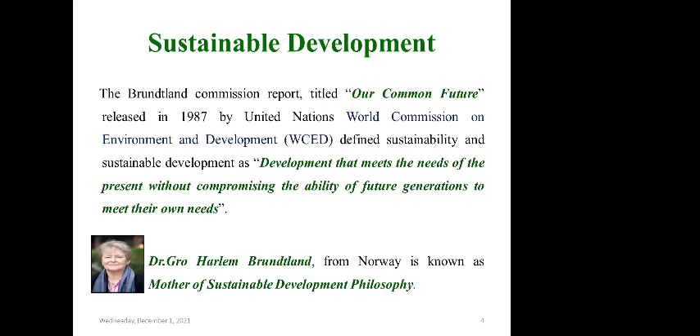According to the United States Environmental Protection Act, a regulatory body, sustainable development is defined as cost-effectively producing goods with minimal environmental degradation. Future engineers should concentrate on minimal environmental degradation while conserving energy and natural resources, which in turn enhances product safety, thereby increasing its global competitiveness. Most of the European Union countries, and even the US, are moving towards this minimal environmental degradation manufacturing process.

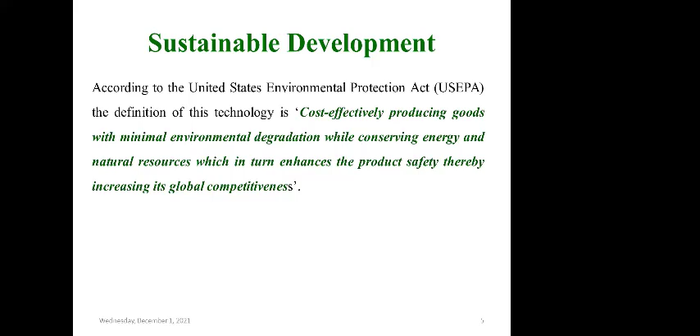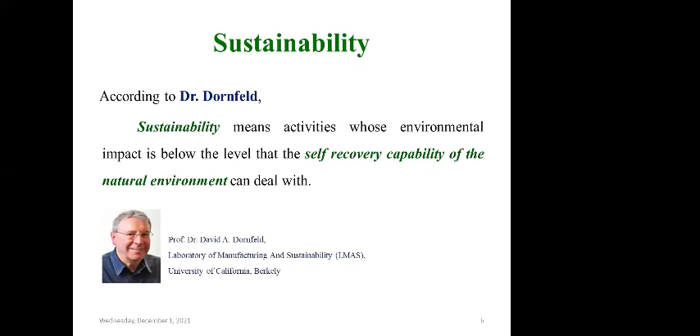According to Dornfeld, sustainability means activities whose environmental impact is below the level of the self-recovery capability of the natural environment. In every nation and in all sectors - for example automobile, textile, medical, aerospace - these are the major manufacturing sectors, and in all these sectors manufacturing is an inevitable process.

Now many countries are showing interest towards eco-friendly manufacturing processes by providing eco-awareness regulations to prevent their environment from further damage.

Here the keyword is eco-friendly. We have to critically think about this word eco-friendly. In simple understanding for the students: the ecosystem comprises all types of plants, animals, minerals, and humans. We humans are the sixth sense animal, and our routine lifestyle should not disturb this ecosystem - that is eco-friendly, and the manufacturing process associated with that is an eco-friendly manufacturing system. Hope you all understood about eco-friendly manufacturing system.

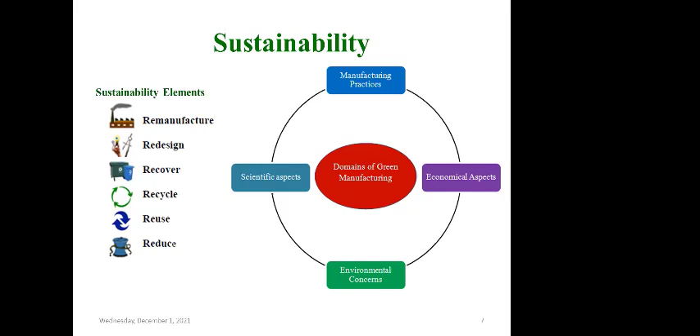Why we have to focus on sustainability? Here I have presented some data. In the last 5 decades, humans have consumed more resources than in all previous history, due to scientific development. In total, 60 billion tons of resources are extracted annually, which is 50% more than just 30 years ago.

As much fresh water is consumed in the last 30 years, let me explain in terms of manufacturing. For producing a car, an automobile, at an average we are consuming 1,48,000 liters of fresh water, not hard water, it is fresh water. 1,48,000 liters of fresh water. Just imagine how big it is.

So how many cars are manufactured in our nation? How many cars are manufactured daily? How many plants do we have? Is a car essential? Yes, it is essential, it is a need. In 2020, without automobiles there is no transportation. But we can think about reusing or recycling effectively. Even our manufacturers are reusing and recycling water, but we can increase the effectiveness of using water with least wastage.

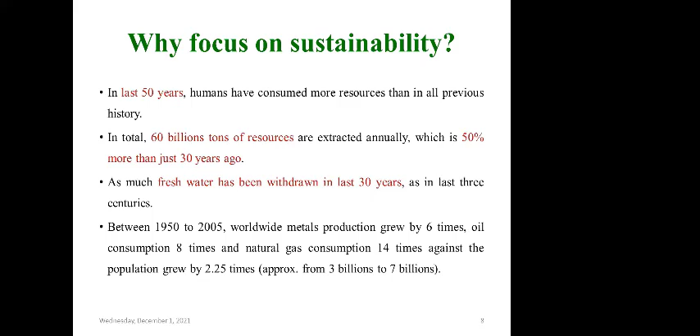So what we have to do? We have to reduce, reuse, recycle, and remanufacture the things. So in sustainability, the wastage should be minimal.

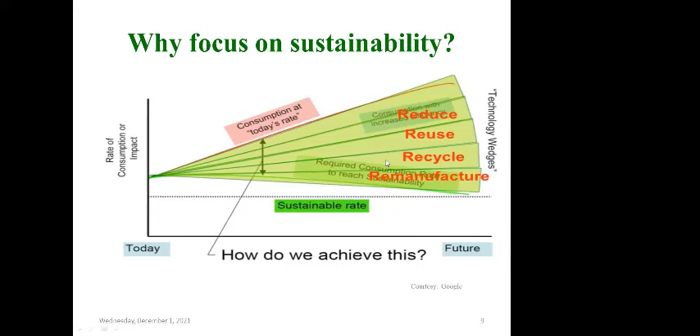So why sustainable manufacturing? As I explained, manufacturing is making a raw material into a final shape or final product, modifying its geometry, and modifying its mechanical, physical, and chemical properties to get a final product. For example, a metal or metal alloy into final engine parts: piston, cylinder, cylinder block, piston rings, connecting rods, shafts.

If that is manufacturing, then what is sustainable manufacturing? It is the same, making a raw material into a final product, but with points like conserving energy, non-polluting, and using minimal natural resources. That should be safe for employees, that is operators, communities, and consumers.

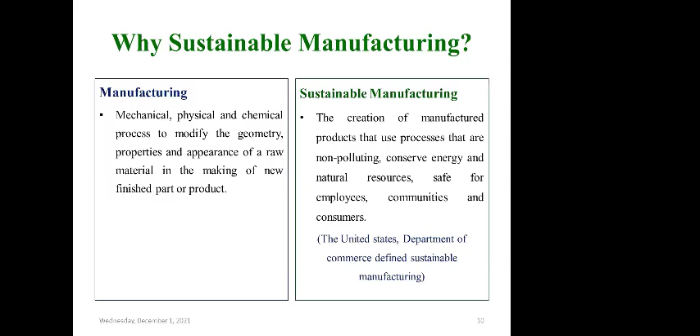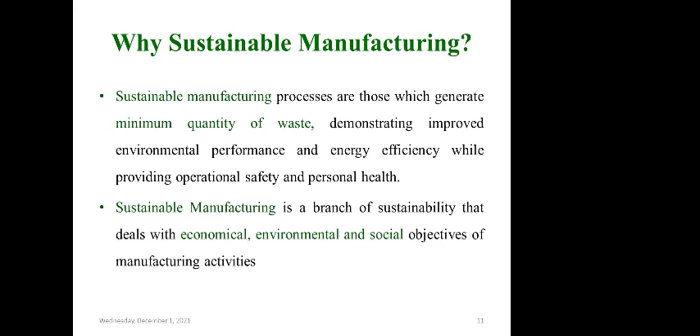So why sustainable manufacturing? Sustainable manufacturing is a process which generates a minimum quantity of waste, leading to zero waste, demonstrating improved environmental performance and energy efficiency while providing operational safety and personal health. Sustainable manufacturing is a branch of sustainability that deals with economical, environmental, and social objectives of manufacturing activities.

Here I have presented some data. Manufacturing is the most resource intensive process among all human activities. According to Niti Aayog, the agency for sustainable development operated or regulated by the Prime Minister's Office, in their report 'Manufacturing India 2025'...

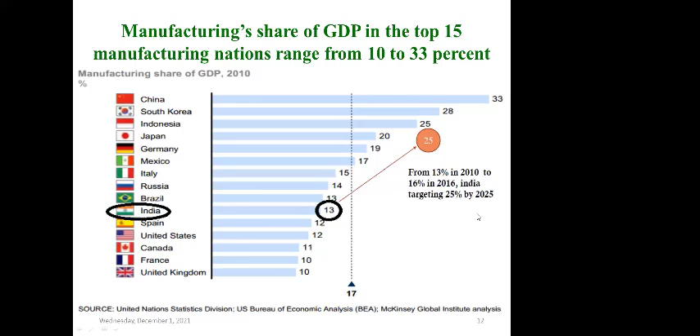The manufacturing share of GDP, that is gross domestic product, in India is planned to rise from 16% in 2016, with a target of 25% by 2025. So we are almost doubling manufacturing in all the sectors. Just think how much resources we need, and whether we are going to follow the traditional manufacturing process or sustainable manufacturing. That is the point.

So the challenges towards sustainability are global warming rising due to carbon dioxide emissions, contamination occurring in air and water, population explosion as I mentioned, and improper waste management. There is a point, improper waste management, that is an emerging research area.

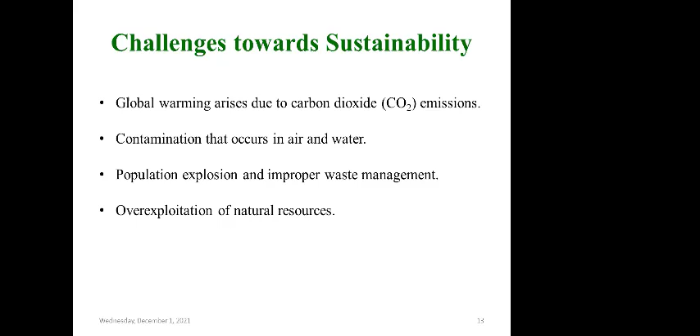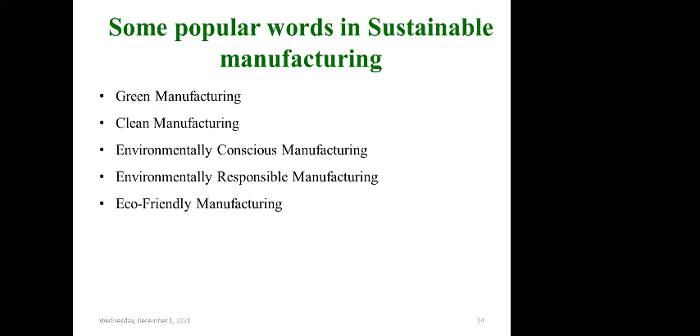There are plenty of projects in this area, including over-exploitation of natural resources as a final point. There are some popular terms related to sustainable manufacturing, as I explained: green manufacturing, clean manufacturing, environmentally conscious, environmentally responsible, eco-friendly manufacturing, and sustainable manufacturing in real-time practice.

Let's see how we practice this through a flow chart or graphical representation. That is, using renewable materials that don't deplete the natural environment. Just remember this point - renewable materials that don't deplete the natural environment. I will explain this point further in the sustainable machining part.

Using fewer materials and inputs, materials that are non-hazardous and are recycled. Modifying the production process to use less energy, water, and materials, and to produce less waste. Using less packaging, lowering product weight, using more efficient transportation and logistics. Working with stakeholders like customers and retailers to reduce the environmental impact of sales and distribution. Expanding the life of the product, making it easier to repair, or designing it to use fewer resources during use. Designing your product to be reusable, remanufacturable, recyclable, or biodegradable.

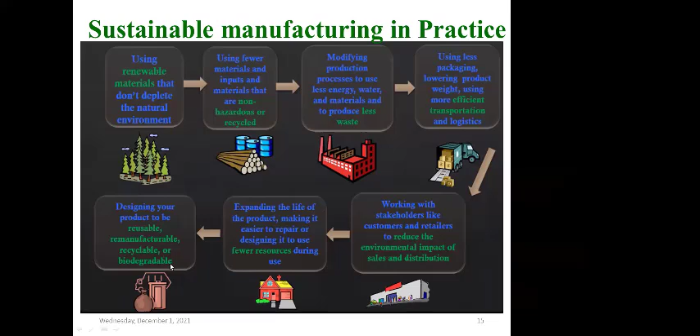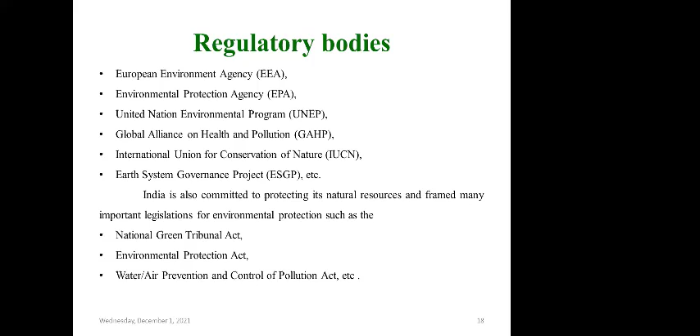The next part is about sustainable machining. What is metal cutting fluid, and what is the need for it? In the machining process, the operator operates the machine.

The simplest, basic machining operation is the lathe operation. Mechanical engineering second-year students practice machining operations - basic ones like lathe turning, chamfering operations, threading operations, boring operations - many operations we can do on a lathe. There you may observe some white color liquid falling in the tool-work interface area.

That white color liquid is the cutting fluid. There are so many types of cutting fluids - the white color appearance shows it is an emulsified cutting fluid. So what is the need of a metal cutting fluid? The first one is that it will cool the cutting tool and workpiece.

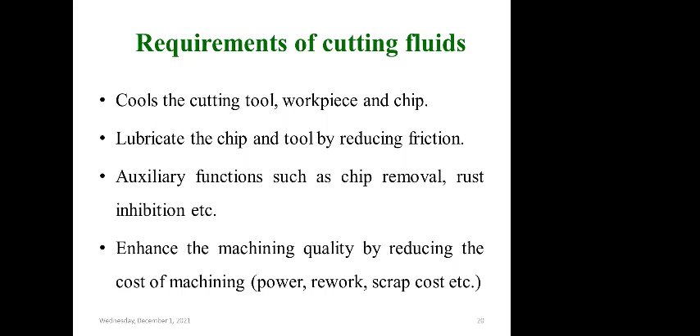Now, air quality issues with cutting fluids. Cutting fluids are highly vulnerable to microbial contamination. Mist and vapor generated are harmful to the operator. It creates lung disease, and direct exposure leads to skin disease and respiratory-based diseases to the machine tool operator. That is the first point: high vulnerability to microbial contamination.

Cutting fluids are reused and stored in tanks constructed at the bottom of the machine, and reused continuously for machining operations, maybe for 15 or 20 days. That depends upon the manufacturer.

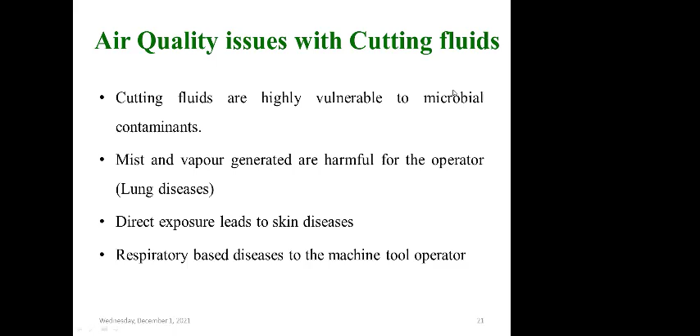Prolonged storage of cutting fluid creates microbial contamination, and it is even vulnerable to fungus. This microbial contamination and fungus is not good for the operator. When these contaminants are exposed to human skin, they create serious issues, very serious issues, like skin cancer being the main one.

Metal cutting fluid consumption is estimated at more than 100 million gallons per year in the US. That is very, very big, and that's just in the United States. Think about our nation and other highly manufacturing Asian countries like China - we are consuming a lot too. The total cost of purchasing and disposal is more than $48 billion as per a US report. Another report says cutting fluid contributes 7 to 17% of total manufacturing cost in a German automobile company.

Disposal and recirculation forms a major share of the cost of cutting fluid.

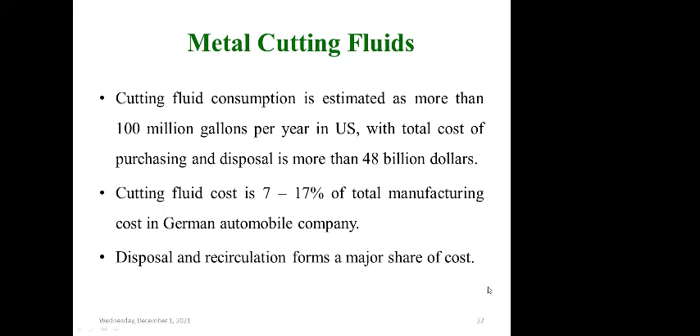So what is sustainable machining? Sustainable machining is towards dry cutting, but dry cutting has some serious problems like high generation of heat that may harm the cutting tool and the workpiece surface. Producing high quality machined product is desirable, but in dry cutting it is impossible due to the generation of heat. So what do we have to do?

Currently we are using petroleum-based metal cutting fluids - synthetic, semi-synthetic oils, and even emulsified oils. There are many mineral-based oils. Even our corporations, that is IOC and BPC, Indian Oil Corporation, are producing machining cutting fluids with different grades.

So what is sustainable? Petroleum-based cutting fluids are not sustainable since it's a natural resource. What is sustainable is towards minimum quantity lubrication - using a very minimum quantity of cutting fluid lubrication to the cutting zone.

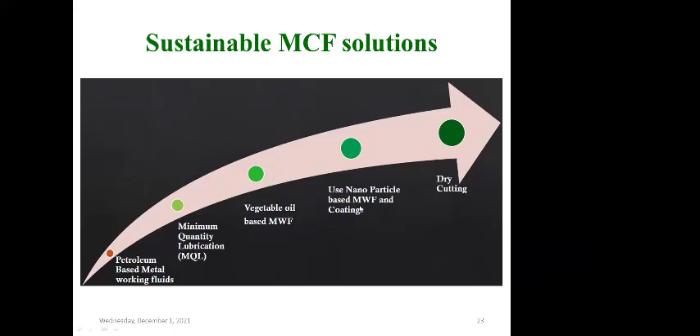So future engineers should think on this while going for machining. Should think of this, right?

So what is MQL versus flood lubrication? As I explained, in MQL, that is minimum quantity lubrication, the flow rate is very minimum, that is 50 ml to 500 ml per hour. Even lesser - in current practice, it is as minimum as 20 ml per hour, 20 ml of lubricant or coolant per hour.

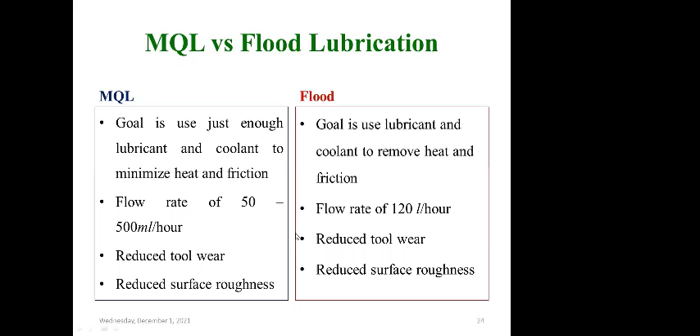Just imagine, 20 ml is very less, very less. So the advantages are reduced tool wear and reduced surface roughness. Even in traditional flood machining, just imagine the flow rate is 120 liters per hour. You just compare it with the MQL - it is very big, very big, right?

So using vegetable-based cutting oils, there are so many advantages: high biodegradability - it does not harm nature, and we are not consuming natural resources. Low pollution to the environment, and compatibility with additives.

Additives meaning oxidative additive, antifungal additive, and antimicrobial additives - those are chemicals. And low production cost, it will reduce the production cost when compared to mineral based. Wide production possibilities, low toxicity, high flash points, high viscosity, right?

And some disadvantages are oxidative stability - we can overcome this by making vegetable oil based emulsified cutting fluid, it will have more oxidative stability - and high freezing points, right?

Yeah, even there are anti-freezing agents available, that depends upon the climate. So practicing vegetable-based cutting fluid in Kashmir, I hope it is not possible because the absolute temperature there is much lesser. It will create some freezing, but anti-freezing agents are there, chemicals.

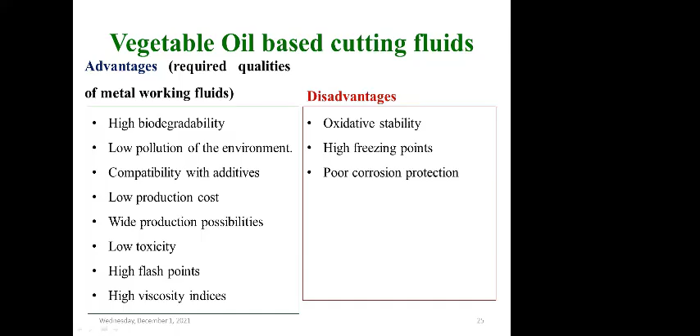Some research opportunities in metal cutting fluids: development of new vegetable oil cutting fluids, MQL using vegetable cutting fluid along with nanoparticles. So the new thing is aligning with Industry 4.0 standards.

So artificial intelligence coupled with automation, which enhances productivity, is the current trend. So if there are some master students, you can think about this - artificial intelligence coupled with manufacturing, artificial intelligence coupled with machining. So artificial intelligence is the future - I say it is the future of engineering, all engineering.

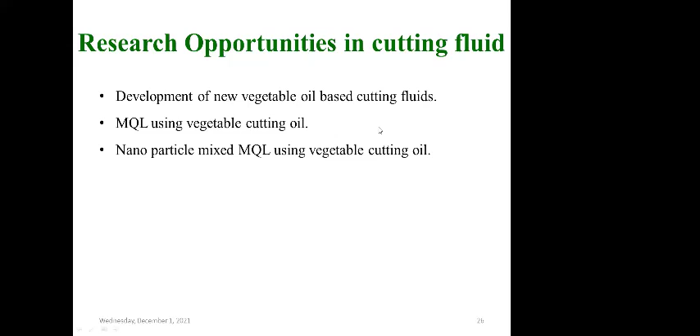And some project opportunities for engineering students: sustainable project opportunities, that is solar water pumping for irrigation. You can make some cost-effective solar water pumping for irrigation purpose - that is regenerating our resources, that is solar resource.

So design of renewable energy based projects - some solar related projects, magnetic refrigeration, wind driven charging of batteries, implementation of solar energy in eco cities, and very many others. These are just a few.

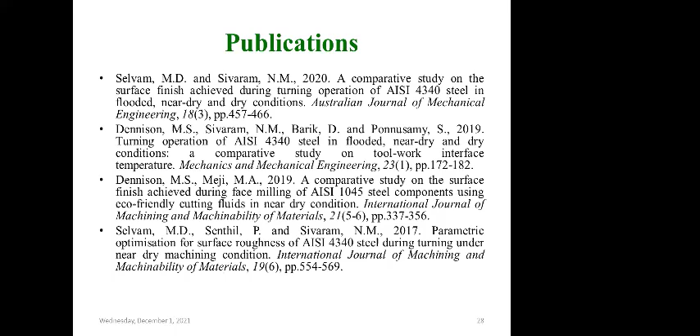And these are some of my publications in sustainable machining, some notable publications. And my final concluding remark is: all innovations are born from needs. So we have to look for the needs - what is the need, what is existing, and what improvement we can make towards sustainability.

So thank you all for listening, and if you have some queries, you can ask.